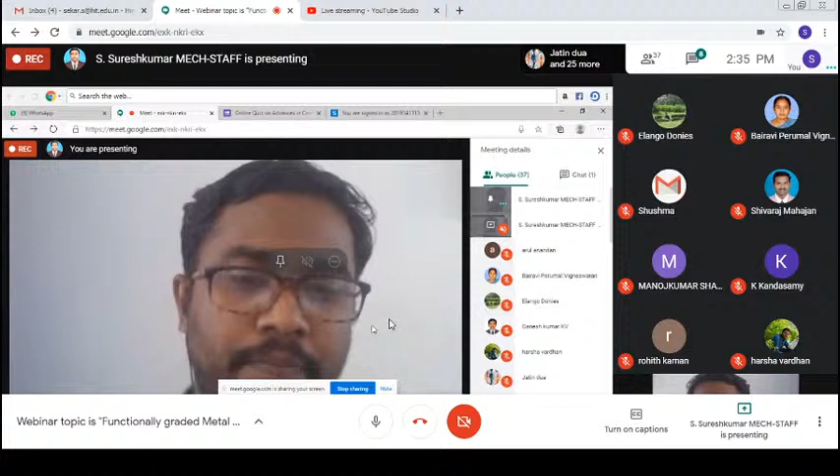Good afternoon to all. This is Suresh Kumar from Kalasalingam Academy of Research and Education. Sir, is my voice audible? Yes, yes. Can someone respond please? Sir, yes sir, clear audible. Okay sir, I will proceed.

Thank you, Dr. Sekar, for your nice introduction. I hope all the participants are good and safe, and I hope you had a good lunch. I will start my session. I will try to complete it in 45 minutes to 1 hour, and then if you have any queries, we will discuss them at the end of the session.

As I pointed out, my area of research is advanced machining. Since I am starting off attempting new areas, I am trying to explore my experience. My presentation will be on functionally graded metal matrix composites.

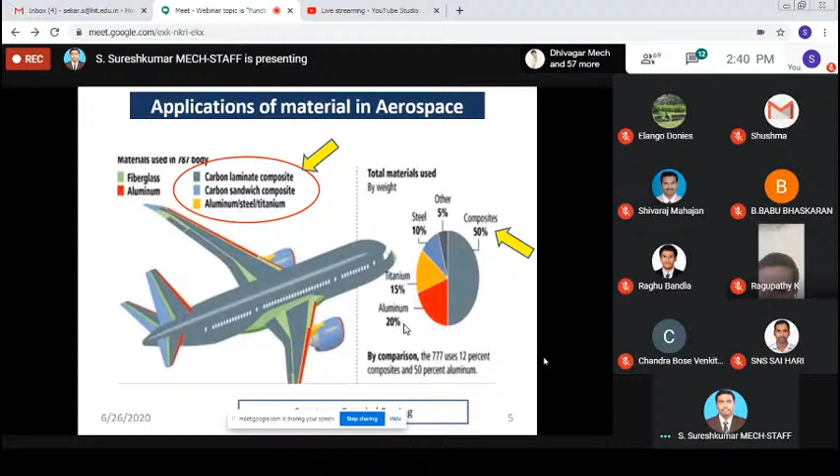So slowly, the existing conventional material of aerospace and flight is being replaced by composite material. From the record, this Boeing model plate has 50% of the material replaced by composites, and other models are maybe up to 12% composites, and even the aluminum roll is more, there is 20%. So I would like to highlight the importance of composite here.

For understanding the composite, you should know what is the meaning of composite. Often we have some confusion with the understanding of alloys and composites. So we should know the basics of alloys and composites. Both are almost similar, but what is the difference? I will go with some examples.

Consider what is the alloy. It is a homogeneous mixture. If you add sugar into the water, after some time the sugar gets diluted, dissolved in the water. So finally you will get a solution having the water and sugar mixed into one. So you cannot differentiate. This is the example for alloy.

Whereas if you add a sand particle into the water, you will see that you can identify or visualize the presence of the sand particle in the water. So this is the example for the composite. So alloy is a homogeneous type of mixture, whereas in composite it is a heterogeneous type of mixture.

In alloy there is a solvent and a solute. For example, there are bronze, brass. These are some of the alloys. Even aluminum, copper, and many titaniums have their own alloy elements.

On the composite side, we have two elements. One is the matrix, another one is the reinforcement. The matrix is the main element of the bonding mechanism in which the reinforcements are added. So I've given you the example for composite.

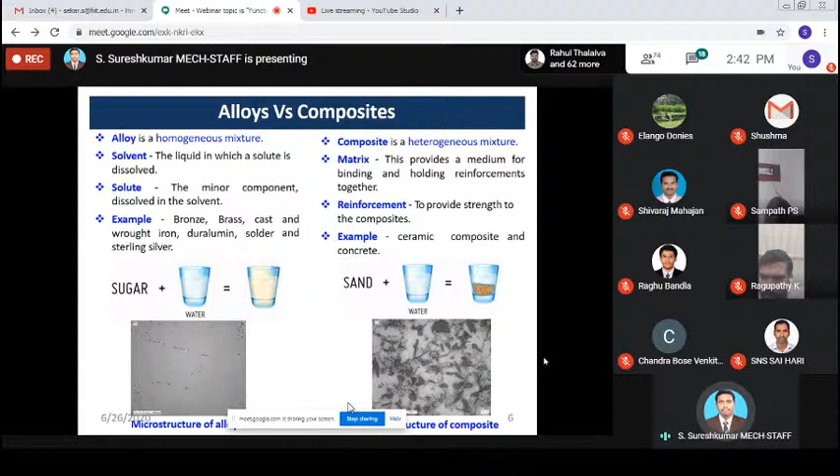Again, I will highlight some examples for the benefits of composite. I will highlight you here. Please listen to this one.

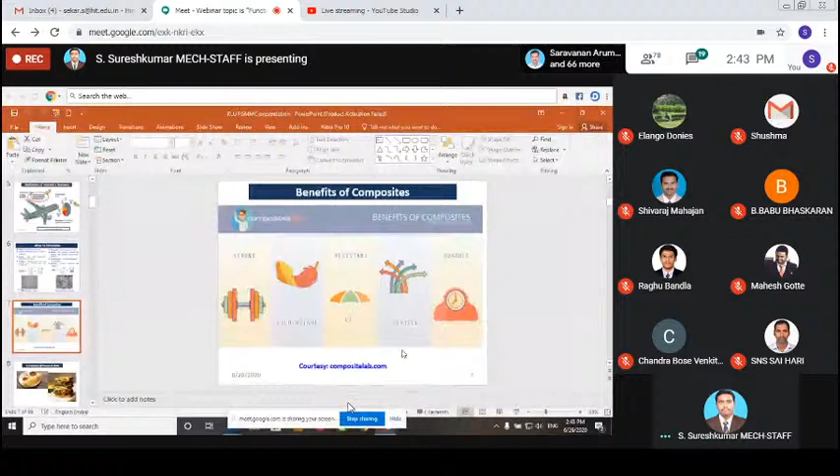So I've given you the example for what may be the benefits or the major advantages of composite material. I have given some examples. Composite material provides good strength, and it's very light for structural applications, aerospace applications, or other applications where I need a lightweight material, maybe the automobile side and all. So aluminum-based composites have a lightweight structure and resistance from thermal load, and it's flexible and the durability is more.

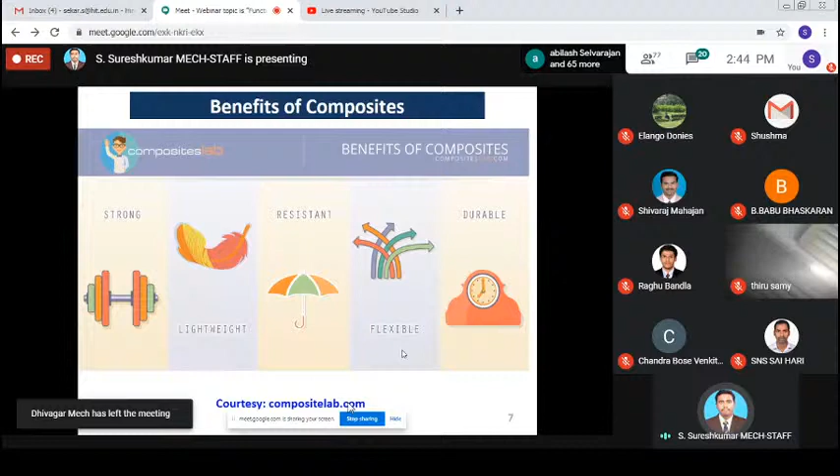Some examples I've given, thanks to compositelab.com, I got this right from the site only. And we think that composite is a very new idea, new things and all, but I give you basic examples and things.

And in between you are adding or inserting some salad, vegetables, right? So this composition combination is an example of a composite material. For understanding, I've given you some basic examples which we see in day-to-day life. And the composite in the human body, maybe the physical aspect I can say, the body and the soul, our spirit together - this is the composite structure available in the human body.

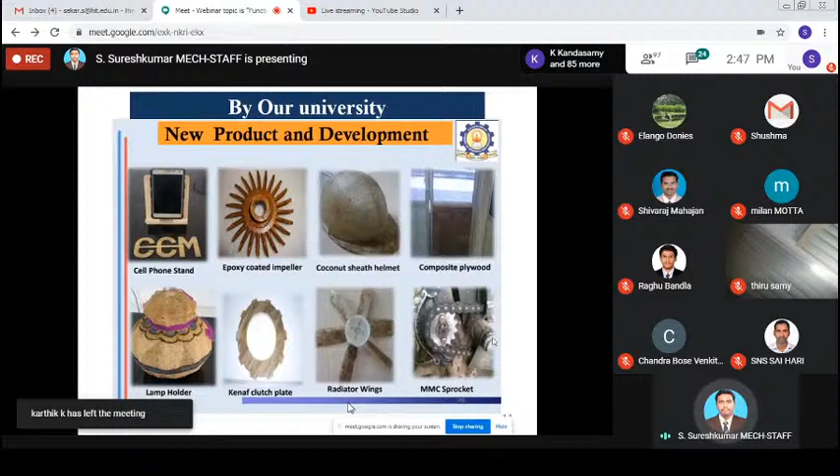Even the fan, the radiator wings - for impeller, or any fan and cooling applications, you can use this kind of wings. This is being replaced slowly by the polymer matrix composite based wings. And the last one is an example of metal matrix composite - we prepared aluminum based composite for the chain sprocket.

So I hope you have some idea about composites. Here the composite is classified based on the type of matrix material used for the product. If you use metal as the matrix, that comes under metal matrix composite; if the base is ceramic material, that is called ceramic matrix composite; and if you use polymers or resins or rubber as the matrix, that comes under polymer matrix composite. These are the very basic classifications of composite material, based on the type of matrix or base material used.

I have given you an example of metal matrix composite. I told you that in metal matrix composite, metal is used as the base matrix material, and some other reinforcement material is added. For example, on the left side, the first image shows an aluminum alloy, A356 aluminum alloy, used as the matrix material, and silicon carbide, which is a ceramic reinforcement material in particle form, is added as reinforcement. When you add this reinforced material into the aluminum alloy matrix, you get an aluminum alloy based composite material - that is the metal matrix composite. Thanks to Professor Vinoth Babu, I got this image from the paper.

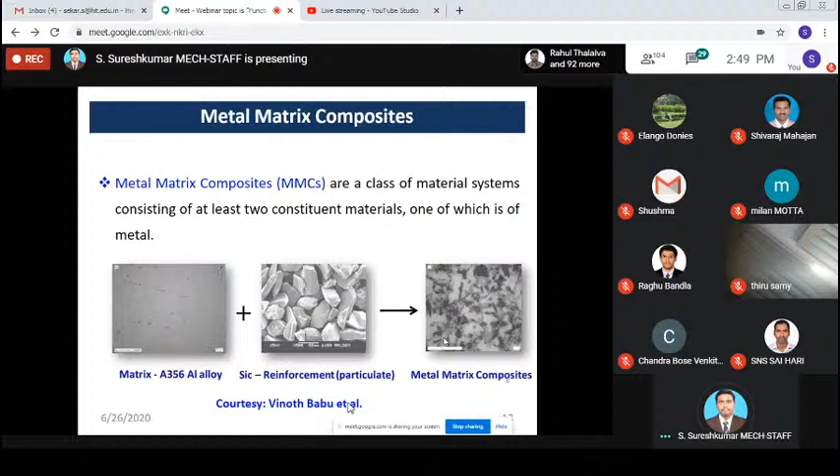The last one, and an important one, is particle reinforced or dispersion hardened composite, which plays a major role. Most metal matrix composites are produced using this kind of method only - particle reinforced type.

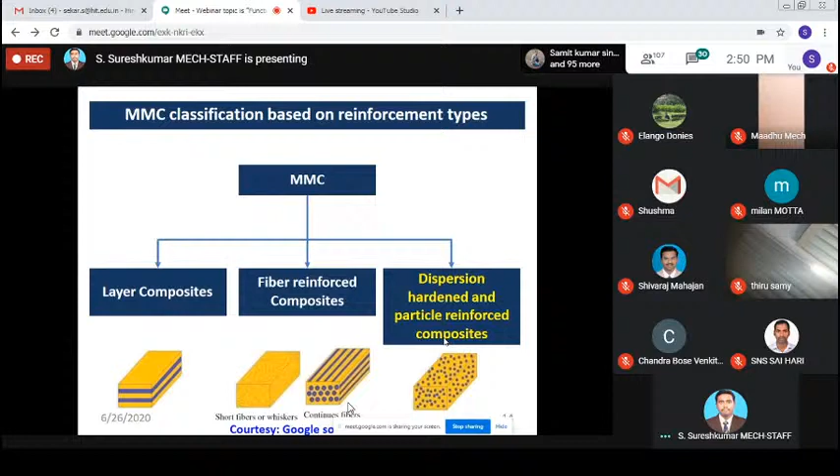What may be the basic properties of MMC? Why are people moving towards MMC? I have listed a few properties: it has good strength, is lightweight, and can withstand high temperatures. It has high corrosion resistance, and stiffness is much higher. It can withstand heavy, larger loads. Wear resistance is high, and fatigue resistance and creep resistance are high. It can withstand higher temperatures and retain its properties even at higher temperature. These are the few listed properties, or advantages, of metal matrix composites.

Some of the examples where metal matrix composite can be used nowadays: engine crankshaft casing, connecting rod, piston head, and electronic devices like circuit boards used in laptops, TVs and gadgets. The last one is wind turbines or propeller units used in aerospace and engine systems. So these are the basic applications.

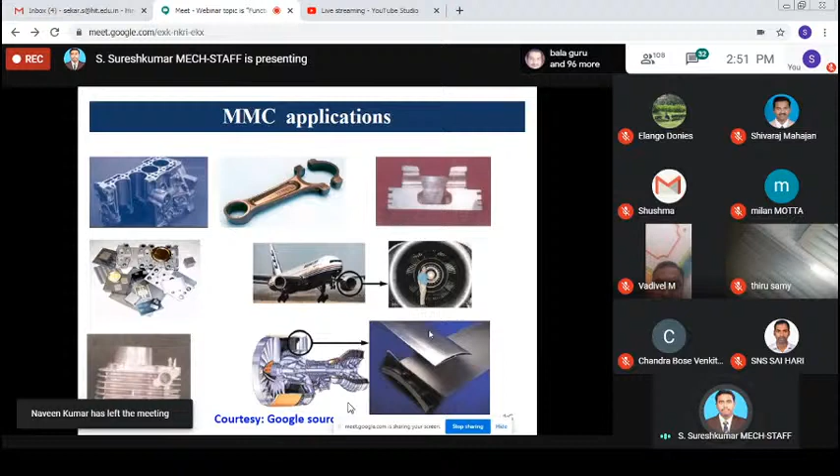Nowadays the MMC plays a major role. And for understanding, let me go back to the same examples.

I told you the chain sprocket, usually made of cast iron steel, is nowadays replaced by aluminum based metal matrix composite produced by our department. Thanks to Dr. Rajesh, sir has developed a chain sprocket made of aluminum based metal matrix composites.

For understanding, I have given you some diagrams. The gear, the sprocket shape, is given in the right side view, and the left side view shows the replacement of the white color sprocket made of aluminum based composites.

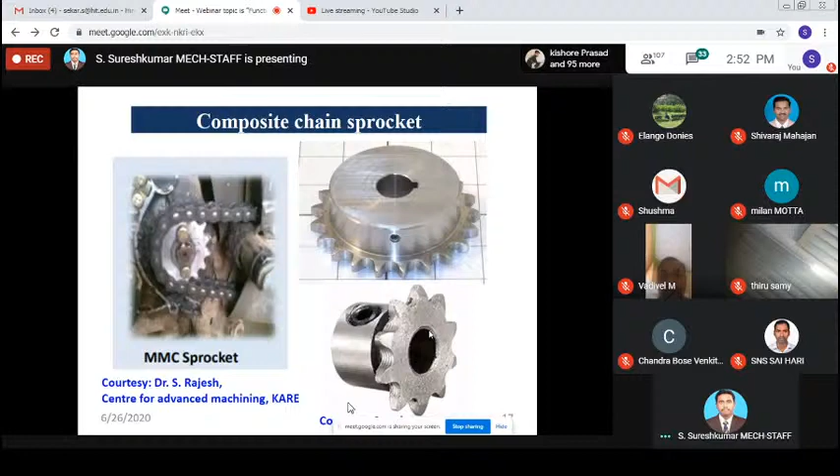Of course, this material has many merits and advantages, but even though, it is having some drawbacks. I will be keen focusing on the drawbacks of MMC here.

The reason is, some of the drawbacks listed here: there is a necessity to produce a composite material for an application, specific to a particular location or condition or service need. But MMC may have the same property throughout the section, whereas some applications need a particular or location-specific property. For example, in a brake disc, the load acts on a particular region only.

That region may be exposed and subjected to more wear than other sections. So if you want to replace the brake with MMC material, that's good, but only the particular region is subject to huge load. So is there any possibility to replace such a material with MMC, where a particular location may need a better property than other regions?

Is there any possibility? So these are some of the drawbacks in case of MMC. It also has a problem with selecting the right fabrication method for a particular material, application, or design need. The cost spent fabricating such a material may also be more, based on the experimental setup required for fabrication. And the last one is choosing the right material for the right particular application.

There are also a few drawbacks with metal matrix composites. So what should we do?

Sorry sir, present now sir. Yes sir, your presentation is... present now sir. Sir, is it okay? No sir. Please click present now. Sir, is it okay? Okay sir. Yes. So, okay, shall I proceed? Okay sir, okay sir, can you proceed sir?

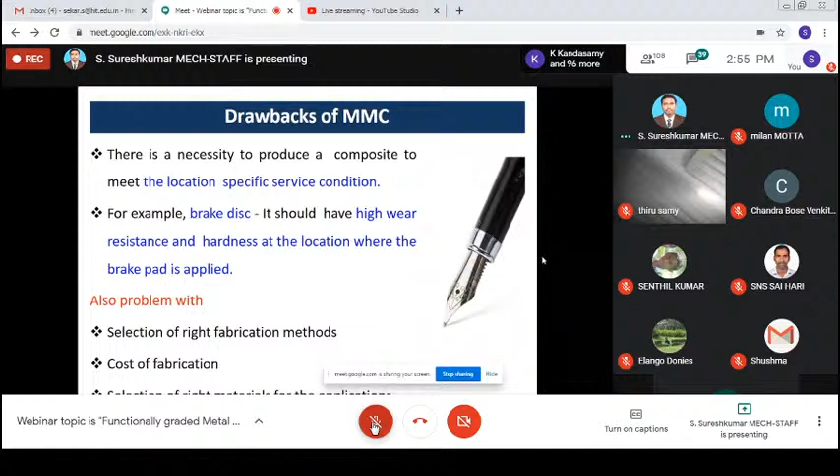So we come across these drawbacks with the MMC. It doesn't have location specific properties, right? What should we do? How can we overcome these things?

So with that, researchers, maybe during the 80s or 90s, later slowly people have picked up on this. They wanted to develop a material where the composite still has location specific properties. How can we fabricate such a thing? What possibilities are available?

So here I have given you some images.

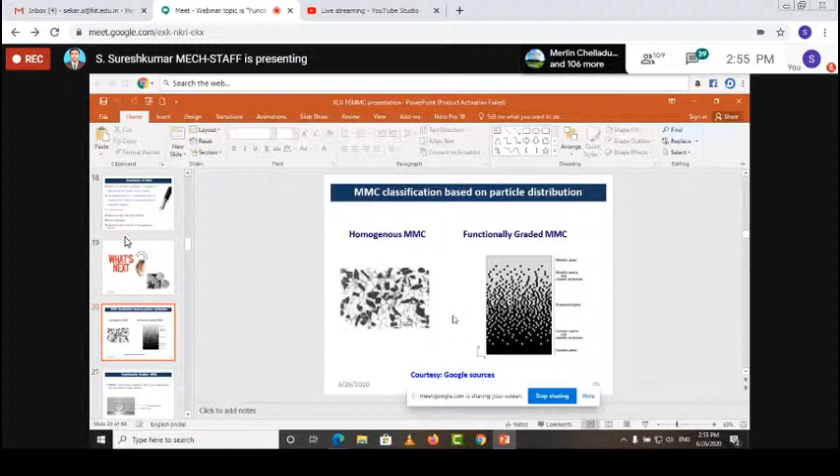Let's look at the example I've given, the microstructure of the metal matrix composite. The white color shows some alloy, some matrix material. The black color...

Sir? Is it okay? So you carry on, sir?

Okay, the left side one is the metal matrix composite, the microstructure of the metal matrix composite. The white color shows the matrix material, and the black color shows the presence of reinforcement material, the hard particles, in this material.

Maybe more or less the reinforcement presence is uniform, dispersed uniformly throughout the area. But whereas if you come to the right side material, see the black color and the white color, you can identify the differences. The presence of or the amount or the area covered by that black color is varying. Maybe at the bottom the black color is more, and if you move upward the ratio becomes lower, the black color becomes less. So it means the reinforcement present in the material is varying.

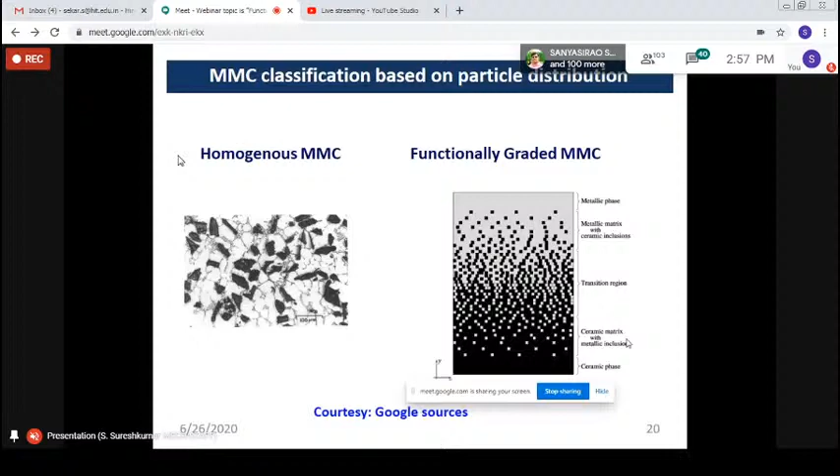The amount of reinforcement present is varying. Maybe at the bottom section it is more, and when you move upward it is slowly reducing, and when it reaches the top point it is almost nil. So how can we vary the reinforcement? I told you, location specific metal matrix composite. How can we produce it? In this case, the reinforcement is huge in quantity at the bottom section, maybe in between it is mixed, and at the top it is less or almost nil. So by varying the presence of reinforcement or grading the reinforcing particle in a particular axis, that is the only solution for overcoming such drawbacks.

Sir, right? Sorry, sir, example. Sir, yes, press sir. Click the present, no sir. Okay, sir, okay.

By varying the presence of reinforcement content throughout the material with some axis or some direction, this is the only solution for attaining a particular outcome or overcoming such a drawback. So this material is called functionally graded metal matrix composite. The name functionally graded indicates that the reinforcement is graded or varying in a particular direction. Maybe for example, I can go with the same thing, the brake and all.

The particular location where the brake pads are applied or holding the brake, where more amount of pressure is being subjected, there you can ensure the presence of more amount of reinforcement particle, whereas in other regions you can normalize the amount of reinforcement particle.

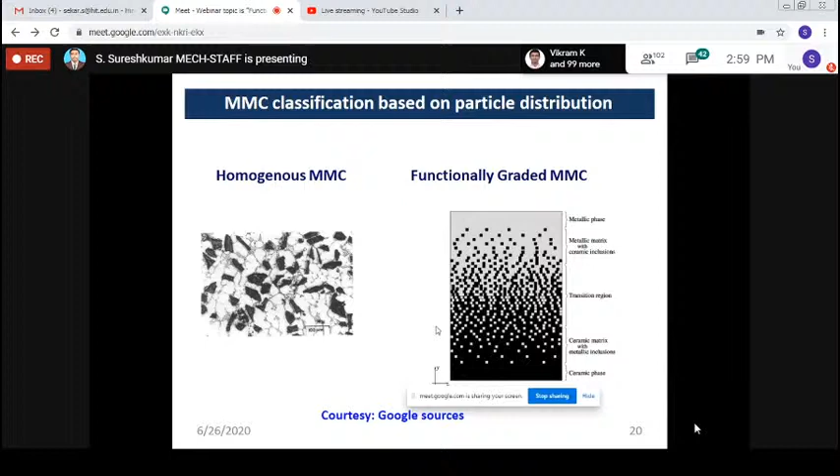Don't think that for fabricating functionally graded metal matrix composite, that is FGMMC, you need more reinforcement overall. Not like this. You are just varying the reinforcement content. Maybe at a particular location you keep the reinforcement content more in quantity, and in other regions you vary it gradually, based on the requirement you can change it. So my point is FGMMC means you are changing the amount of presence of reinforcement material in a particular direction based on your requirement. That is the understanding you can come to know from functionally graded metal matrix composites.

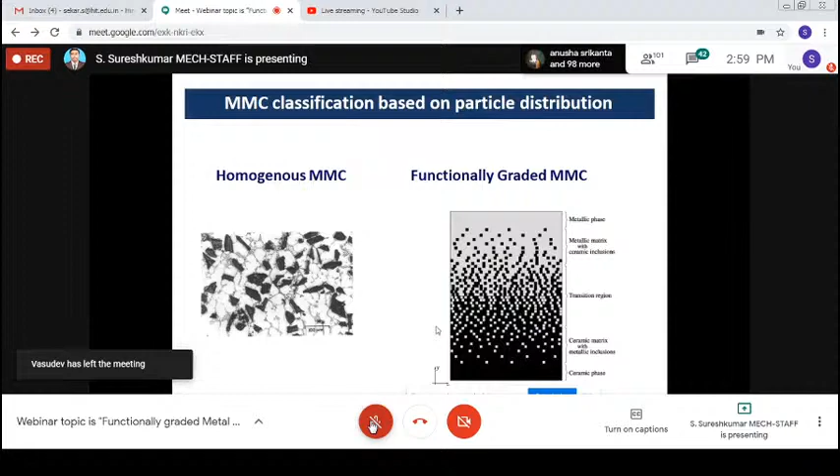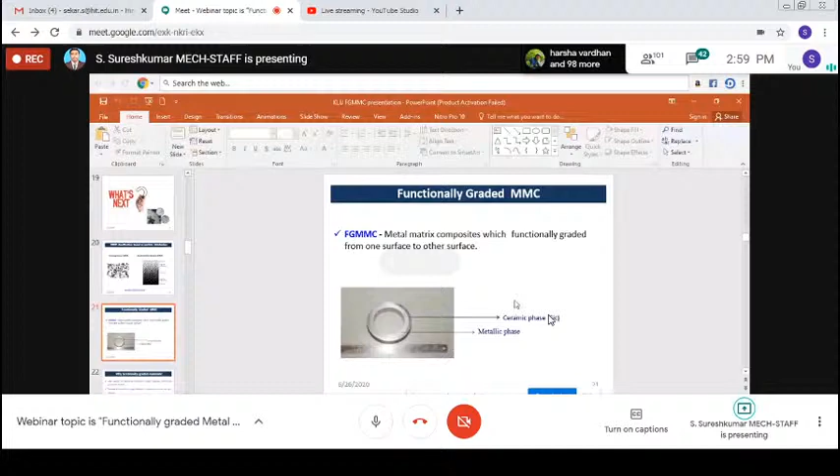Understanding how the material looks like, I give one example on images. Sir, please present now. Sir, it shows like it is presenting. I don't know what is happening. Is it okay? Okay sir. Sir, please try another option here below the slide. Hide. Stop sharing and hide, and please click in your system. Yes, okay sir, okay sir. Sir, please click the hide. Okay, okay sir, thank you.

Okay, right. I give you the example of the FGMMC. Actually it is a tab what we use for packing items, right, so this is the same thing I gave as an example. See the one end, that is the left side, inner portion, inner periphery, marked as white color, that we can call metallic. The plastic cover, the tab material, the tab, that you can consider as the ceramic region. So one end we are having more metallic phase, another end we are having the ceramic phase. So you are varying the presence of ceramic phase from one region to another. Just for understanding, I gave you this example, the packing tab, where one end the tab is more, and at the other end it is not available, right.

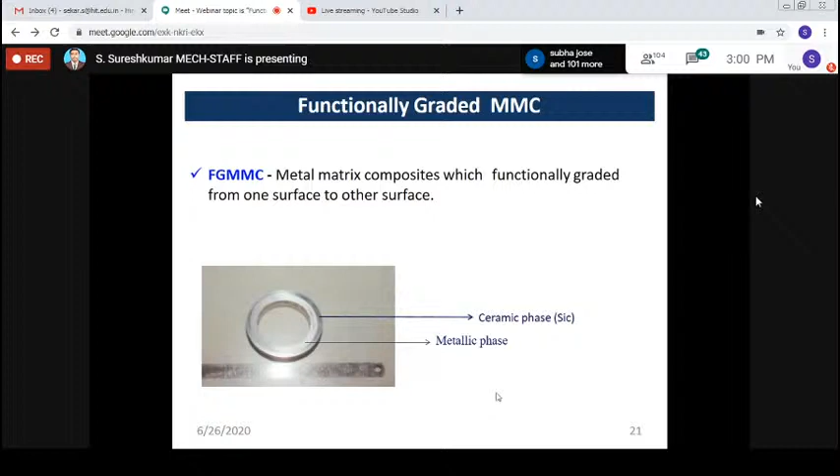Why, or at what locations, is there a basic need for functionally graded materials? Again, I give you some other similar examples. Gear failure happens with more wear at the edges, maybe the gear teeth and all. So we often come to the conclusion that the wear edge, the teeth, has more worn surfaces. So once it is worn out, we cannot use this gear anymore. But the other surfaces don't have any fault. Simply being worn out in more quantity only at the teeth means we need to replace it.

For such cases, we can go for functionally graded materials. As I told you, you can have more reinforcement material only in the teeth sections, where this region may need more resistance to the load, whereas the other region can ensure the presence of a lower or minimum amount of reinforced material.

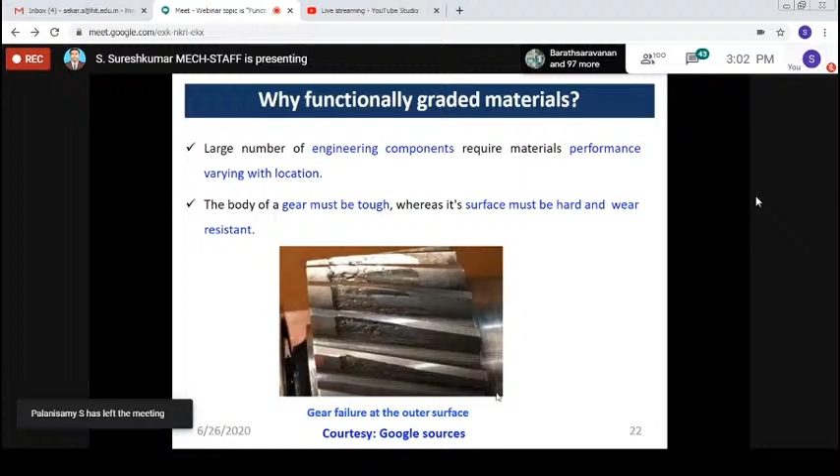Only where the more wear and tear is happening, those regions you can concentrate where you can ensure the presence of more amount of reinforced material. For example, in many applications the gear is being used, so only the teeth section is subject to high wear and tear. Another example, if you look into the piston, the piston head is mostly subjected to wear.

Maybe we are using the lubrication, but of course there will be wear and tear occurring at the outer surface, especially at the head section of the piston. So more amount of wear is happening there.

The second thing, the brake pad is located only at a particular circumferential area, so more amount of wear is noticed there. And again, in case of turbines, the propeller side, even the aerospace side or power plant, the turbine blade is subject to a huge amount of load.

So if you look into the other part of the component, you won't notice much wear. But only at the edges or a particular location or specific point, you can have more wear and tear. For this kind of application, you can go with functional graded materials, where a particular point needs a material having a superior property, whereas the other section may need a normal level. So the properties may be enough, but maximum load occurs only in a particular region. For dealing with or replacing such a material, you can go with functional graded material.

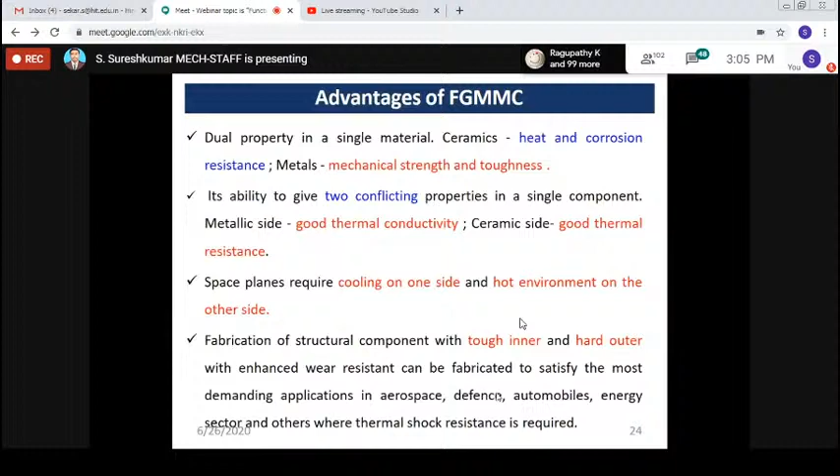Maybe one surface or outer region is exposed to a different load, whereas the inner portion of the material can hold different properties. Especially in this kind of application, the role of FGMMC is important.

How can we fabricate the FGMMC? Is there any possibility? What is the mechanism they are doing? Most widely, centrifugal casting is the way. Casting followed with centrifugal casting is the most widely used fabrication technique for forming functional graded metal matrix composites.

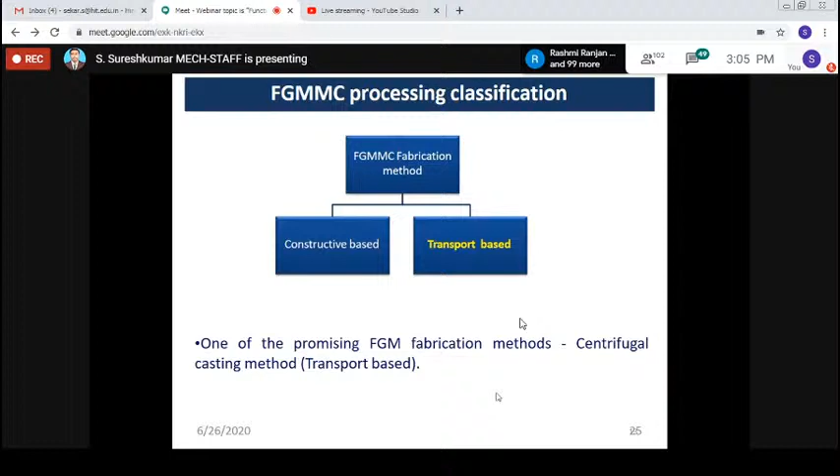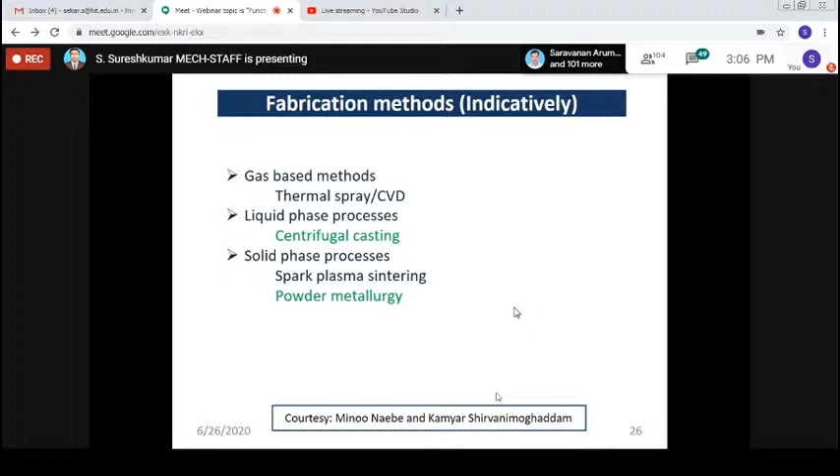These are collectively the fabrication techniques I have mentioned: thermal spray or chemical vapor deposition, centrifugal casting. For solid phase, you can use powder metallurgy, which is a very new thing. Even through thermal spray coating, you can form a material having different properties. In a particular region you can go for more layer coating, whereas in another region you can go with a lesser number of coatings, so the variation in coating will result in different properties. Like centrifugal casting, which I will explain in detail, spark plasma sintering and powder metallurgy are also fabrication techniques I will give you for better understanding.

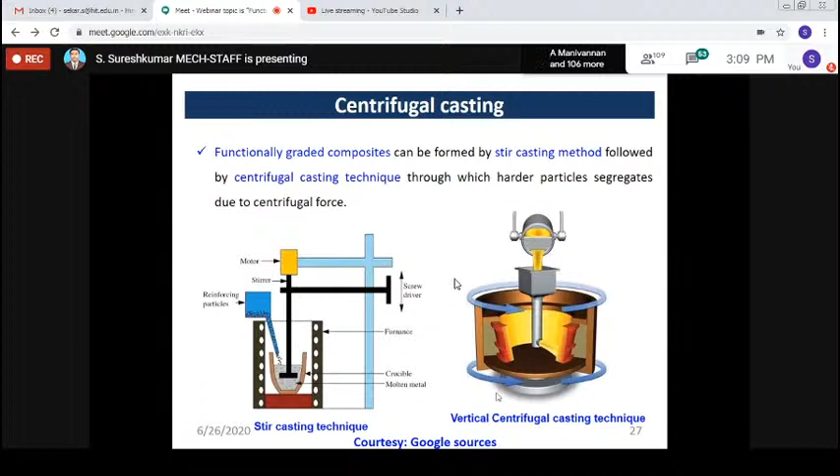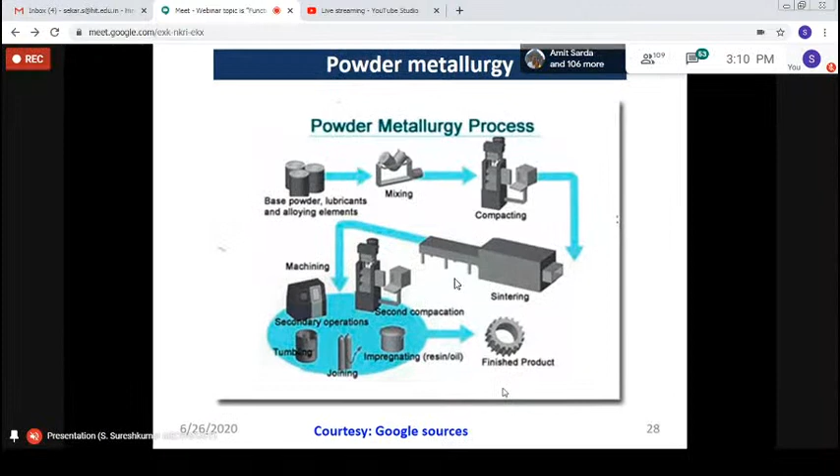The second technique is powder metallurgy. In this case, you can produce or fabricate any kind of object, any cylinder or rod, having varying reinforcement content. You can stack the powder and reinforcement blended mixture in different ratios, and thereby get the desired property.

Powder metallurgy is a solid-state composite material fabrication technique. Here you use the material in powder form, so you can mix the materials. For example, I will take aluminum powder and the reinforcing particles, blend and mix them, and pour the mixture into a die, where the material is subjected to compacting under high pressure.

After compacting, you keep the sample in a furnace for the sintering process, the heating process. Sintering may be done at almost 80-90% of the melting point of the matrix. So after the sintering process, you can produce the composite material.

It is a very conventional way, but for functionally graded metal matrix composites, the material that you add to the die will vary. In the first phase, you add a mixture having a particular ratio of reinforcement. In the next layer or stage, you can have more reinforcement, a mixture with a higher percentage of reinforcement.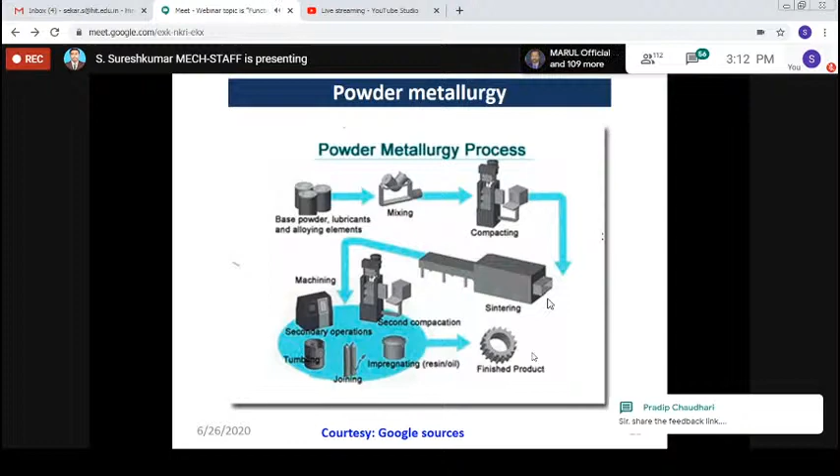For example, for a gear, you can choose this kind of approach: only the teeth section or head section needs more strength, which you attain by using the last section of the mixture, having more reinforcement particles. This is one way of attaining such properties.

So as I told you, powder metallurgy and centrifugal casting are the most widely used techniques for fabricating functionally graded metal matrix composites. For understanding FGMMC...

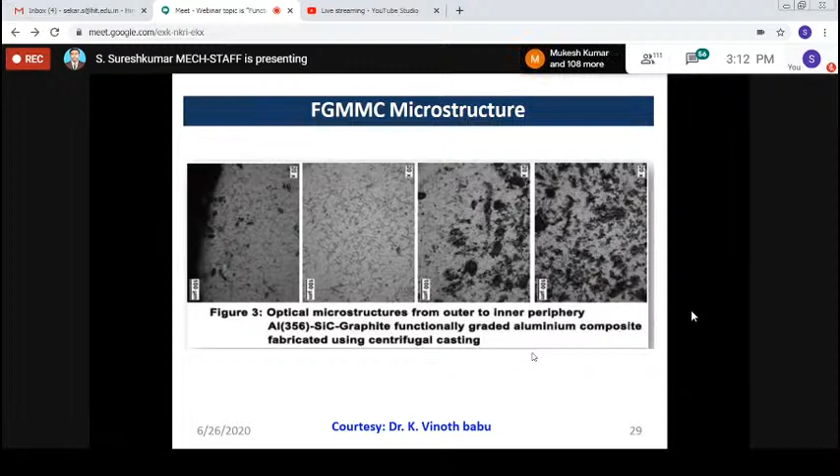I've given you the microstructure from the previous paper — maybe at one end, showing the amount of reinforced particles, and at the other end, how it varies. As I told you, you are producing a hollow object: the inner section is shown on the left side of the image, and the outer surface of the material is shown on the right side.

Most of the participants mentioned the audio is low. Maybe on the left side it is less, maybe on the higher right side it is more. That means the reinforcement, the amount of reinforcement present in the outer shell is much more, right? This is actual work published in good journals.

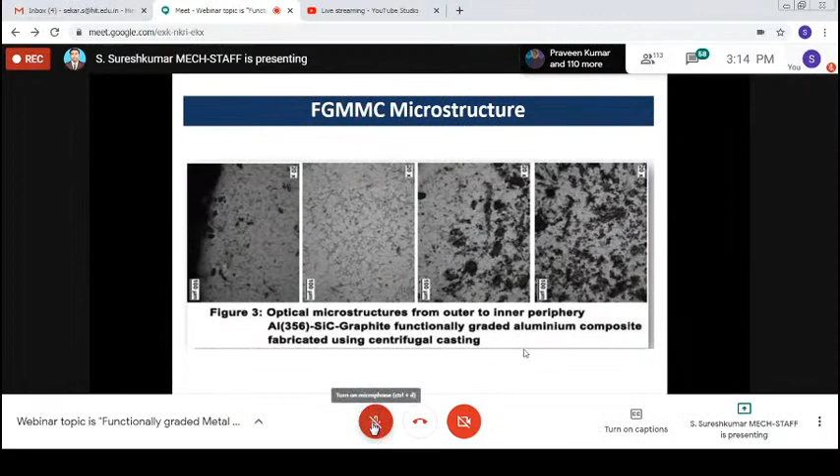So through centrifugal casting, this was fabricated, which has different properties. The outer section has more reinforcement content, whereas the inner portion, the left side image, has the least amount of reinforced particles.

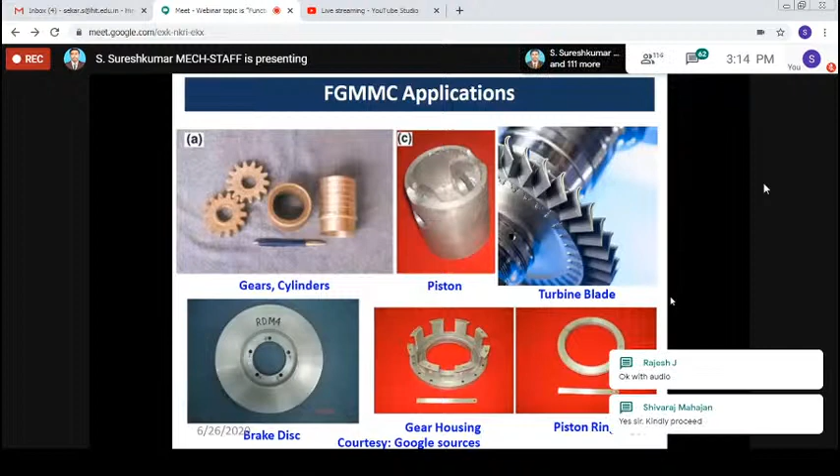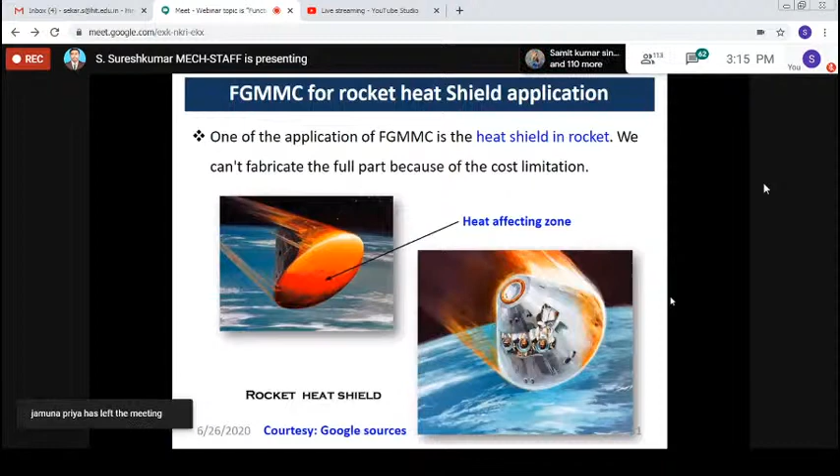Another example is in the space application area. Maybe one area needs to be a more heat affected zone, subject to more heat energy, whereas other regions may require a lower temperature. For this kind of application, you can go with FGMMC. One end could have a more ceramic rich region which can withstand huge thermal load, while in other sections you can lower the amount of reinforcement, where the metallic phase may be good.

We have discussed how we can fabricate the FGMMC. Now my question is whether the fabricated FGMMC could be used for real product activities. Of course, the produced material may have irregularities in the surfaces. How can we deal with such material? How can we convert the fabricated FGMMC composite material into real-time application, real-time uses, or use it for making the product?

For this we need to go with secondary processing, as we do processing for converting the produced FGMMC product, the FGMMC composite, into real-time products. We can come across a few secondary operations, but the most widely used choice is...

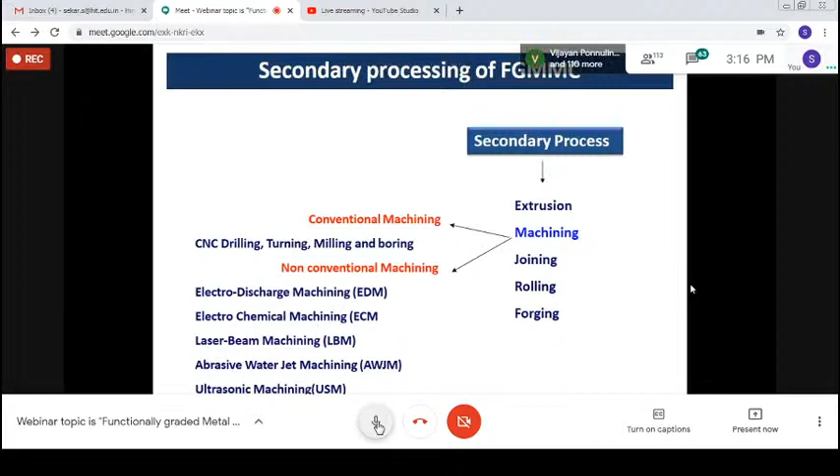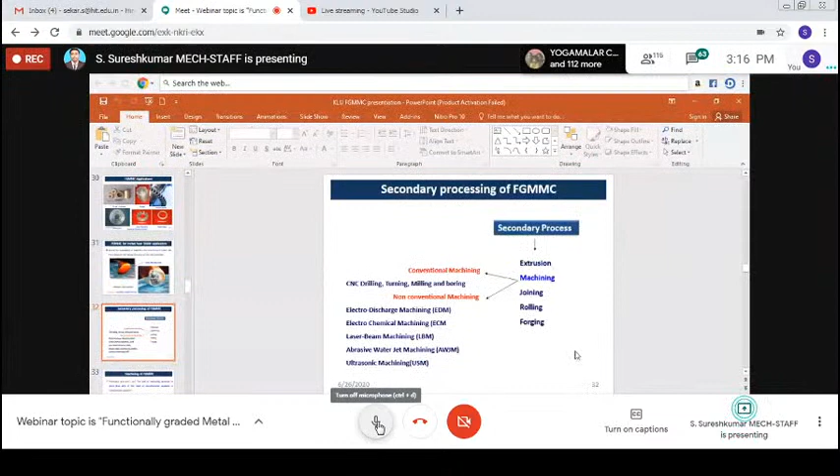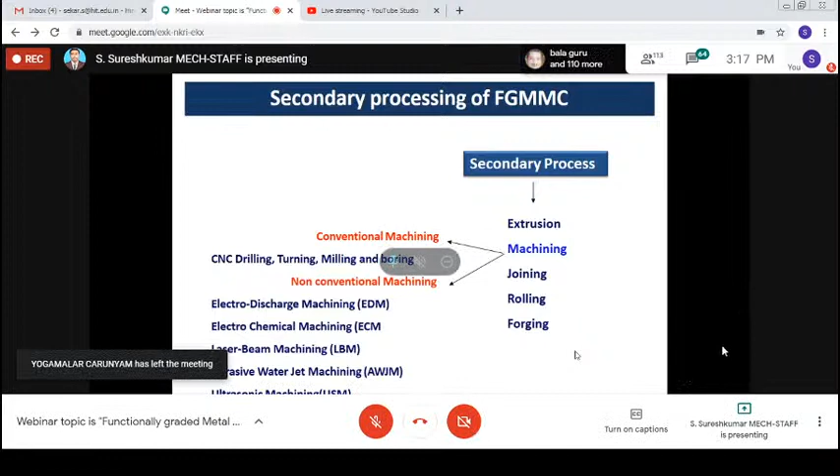Most people know machining is categorized into two aspects: conventional and non-conventional machining. So FGMMC could be prepared or processed through any of these conventional or non-conventional machining processes, so that it could be made into a readily usable form.

Few researchers have already attempted to process the FGMMC material by conventional methods of machining, and researchers have also started on non-conventional machining processes.

Machining is now an inevitable thing, because the cost of machining amounts to more than 20% of the manufactured product, but it's supposed to undergo the machining process to bring the product to the required state. Sometimes machinability is very difficult, because the presence of reinforcing particles rich in quantity at a particular point leads to poor machinability.

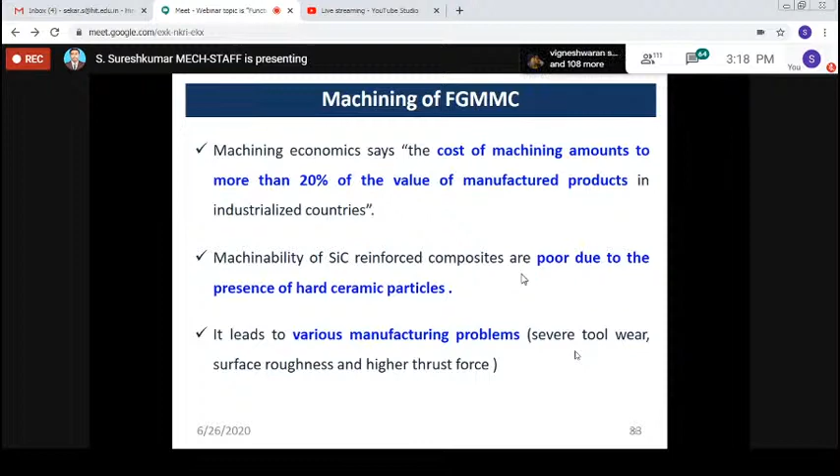Sometimes we will come across various manufacturing issues, like more severe tool wear, poor finishing, and the machining process being subject to a huge amount of thrust force. So we need to consider that aspect also.

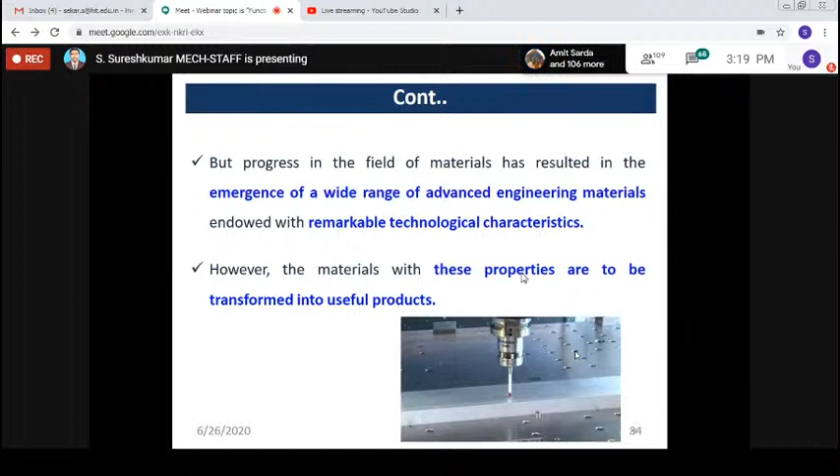Progress in the field of materials has resulted in the emergence of a wide range of advanced engineering materials, and we also need to consider that with remarkable technological characteristics. However, materials with these properties are to be transformed into useful products, so that's why we need to choose machining operations.

FGMMC are often covered with near-net shape processing, and achieving final designed dimensions and required surface is also a mandatory task for engineers and manufacturers nowadays. Secondary machining operations like turning, drilling are also required. Good machinability may be implied by the optimal combination of cutting tool settings and good surface finish, with lower wear, fewer burr formations, and better material removal.

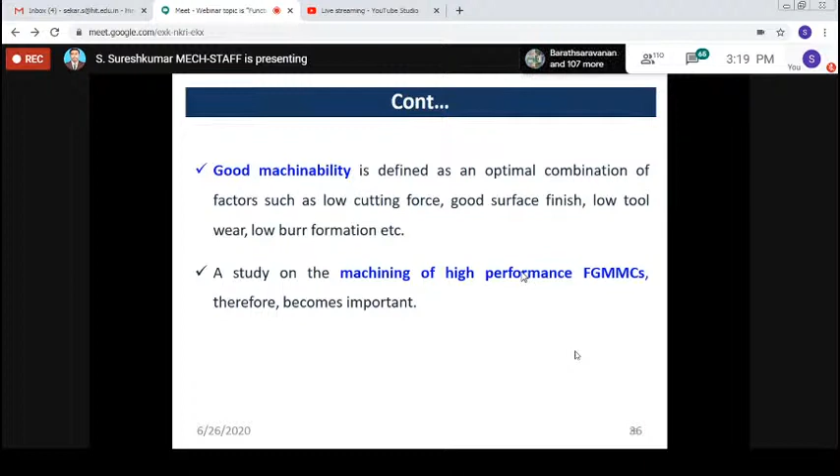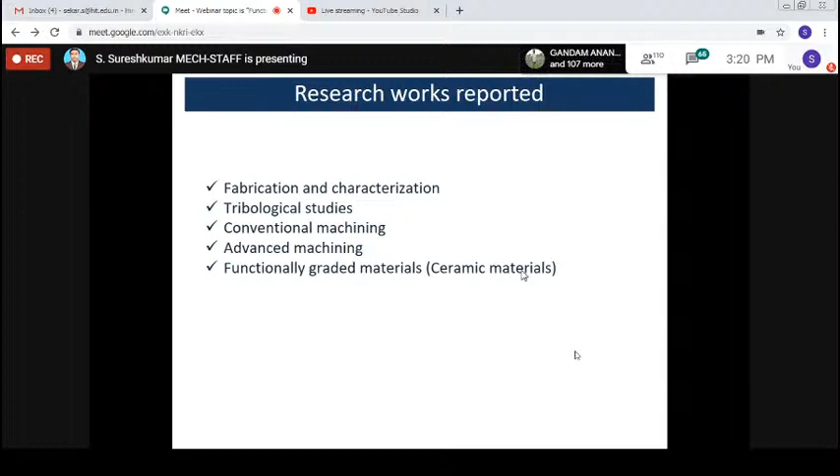I will now move on to the research work reported so far on FGMMC. I have categorized this research work: some authors were interested in fabricating the compound FGMMC and characterizing it as a material, a few did tribological studies to understand the wear resistance of FGMMC for certain applications, some attempted conventional machining while others tried advanced machining processes, and very few have formed ceramic based functionally graded materials. So I have categorized the research reported on FGMMC so far into these aspects. Hereafter I will be discussing the research work reported so far.

Even though research on this topic started in the 1980s, after around 2005 or 2006 the research work reported on FGMMC increased significantly.

Sorry sir, excuse me sir. Someone is having a personal issue. Is it okay? Yes sir, okay.

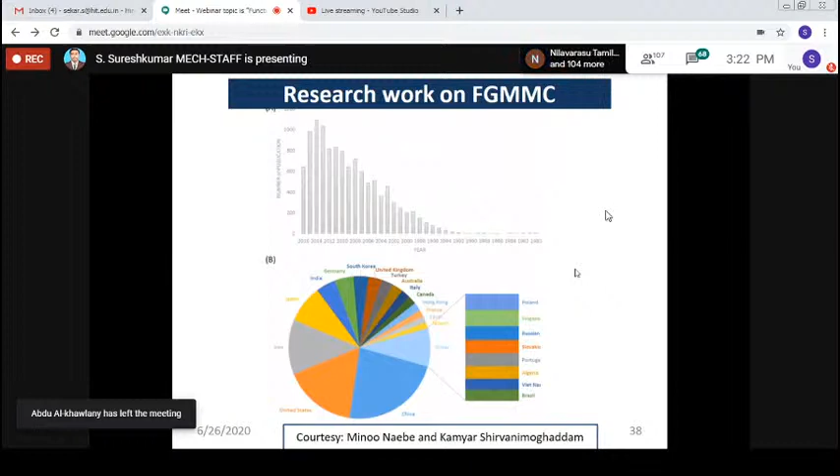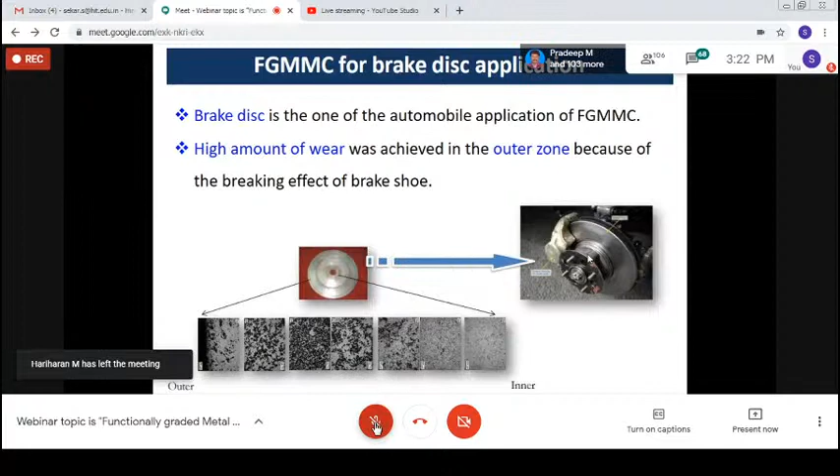Professor Vinod Babu and his team attempted to fabricate a functionally graded metal matrix composite for brake disc applications. In the middle, I have shown the product they manufactured using stir casting followed by centrifugal casting, and its microstructure. From the inner region to the outer region, the amount of reinforcement content varies.

Sorry, excuse me sir. Is it okay, sir? Okay sir, Mr. Suresh please mute your audio. Shall I continue sir? Okay sir, sorry, can you carry on sir? Yes sir.

He fabricated the FGMMC brake disc, made of aluminum alloy reinforced with silicon carbide at different amounts. Looking at the microstructure from the right end, the inner periphery of the brake disc has less reinforcement. Moving towards the left end it increases, and at the leftmost end, the outer periphery, it reduces again. So the third and fourth microstructure images show a particular location with more presence of silicon carbide particles.

This shows that only in a particular region is more reinforcement available. I want to highlight that the brake is subjected to more load at particular regions, so if that region has more reinforcement than the aluminum matrix alone, it can withstand a huge amount of load and have more wear resistance. With that idea, they fabricated the brake disc; that is their design philosophy.

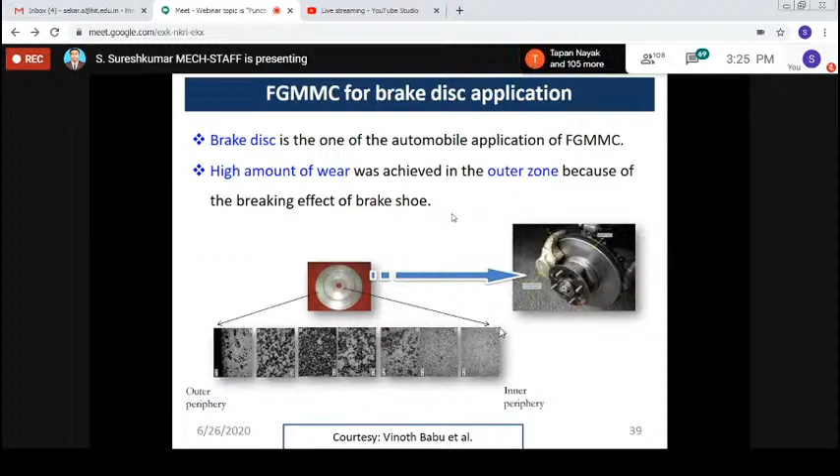They characterized the materials using optical microscope images. The middle region of the brake disc has a rich reinforcement structure, whereas the other regions have the least reinforcement.

Other researchers reported similar findings. This graph helps us understand the presence of silicon carbide concentration in different regions of the material. At the outer surface, up to about 3 or 4 mm, the presence of reinforcement particles is more, maybe 50-60%. Moving towards 5, 6, 7, 8 millimeters, the quantity of reinforcement particles becomes less. Another diagram shows the same trend.

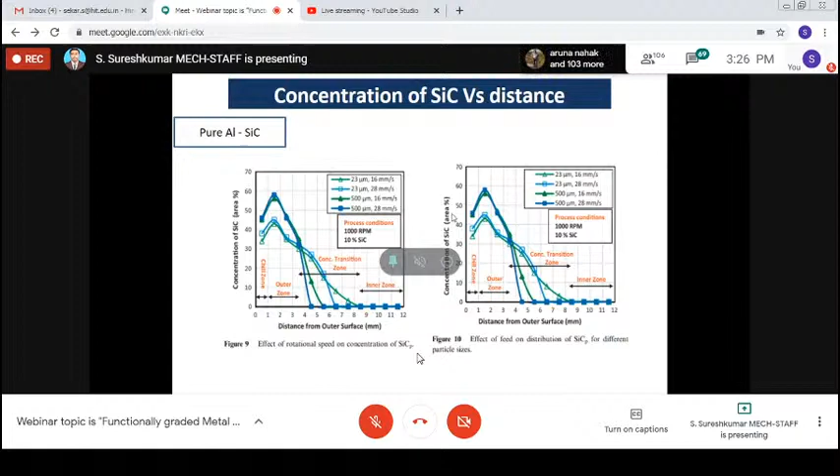So only in a particular region can you identify or ensure the composite has more reinforcement particles, whereas in the middle or transition zone it is normal, and in the inner zone of the material it is very less.

With that same aspect, here is another research work, a tribological study on wear carried out on FGMMC material. Especially in automobile applications, the brake disc undergoes abrasive wear, scratching caused by the pressure applied by the brake pad.

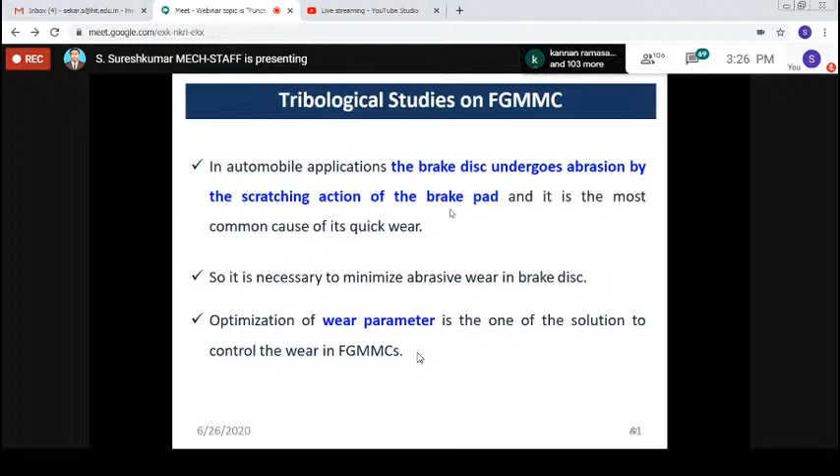So how can we minimize this wear? In that aspect, the second example is the piston. Dr. Arsha et al. fabricated an aluminum alloy based FGMMC piston. We have compared the left side image showing the fabrication setup of a vertical casting machine, and the right side shows two piston views, one made with aluminum alloy A390.

A section view is shown. The head section of the piston is subjected to more wear and tear, whereas the skirt at the bottom side is subject to lower wear. So we need to produce a piston having more wear resistance at the top or head section.

The yellow arrow mark shows that the presence of reinforcing particle is higher, increasing hardness as we move towards the head section of the piston. The reinforcement amount is varied, gradually increasing upward, so the top section has more reinforcement particles. This section will have more wear resistance and can stand more load.

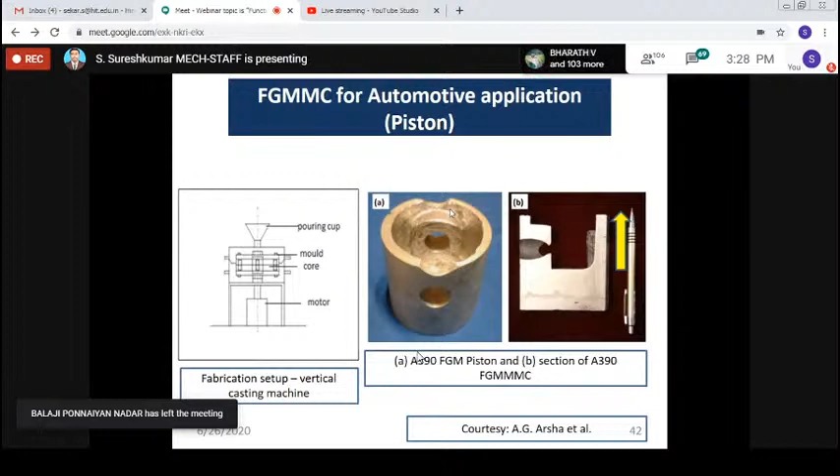The wear rate reported by both materials, the aluminum alloy and the composite produced by vertical casting, show that the head side has more reinforcement while the bottom side has less. Comparing the wear resistance, the weight loss after the wear test is comparatively less on the head side. This indirectly indicates that the wear resistance of the head section is higher than the middle section and the skirt or bottom side.

In both graphs, three lines are marked. The lines show the wear loss occurring at the head section, middle section, and bottom section of the piston, indicating which section is subject to more weight loss and more wear.

They reported a gradual decrement in weight loss, meaning the wear rate decreases when varying the percentage of reinforced particles throughout the section. The head section, having more reinforced particles, is subject to a lower weight loss of maximum 0.01 gram, whereas the bottom section is subject to about 0.04 to 0.05 gram, meaning more weight loss occurs at the bottom.

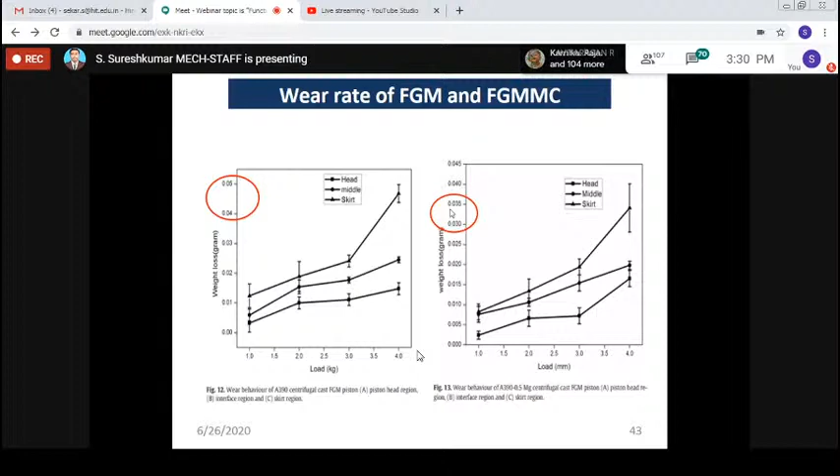For another example, Professor T.P. Raj, a scientist, in his research paper mentioned he fabricated a composite having different reinforcement, with the reinforcement content varying.

The left side, figure A, shows the alloy only with no reinforcement. The middle image has a minimal amount of reinforcement, and the last one has more reinforcement. He compared the hardness of the FGMMC material produced as a function of the distance from the outer periphery to the inner periphery.

At the outer edge, it is normal, but at 5 mm or 10 mm from the outer edge, where more reinforcement is available, it ends up with more hardness. Whereas moving towards the inner periphery, the hardness value obtained is less, gradually decreasing. So moving towards the inner region or inner section of the material, there is a gradual decrement in the hardness potential.

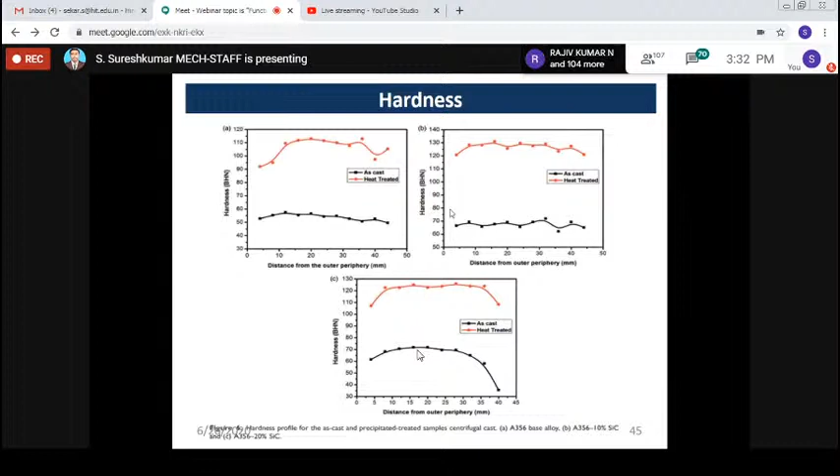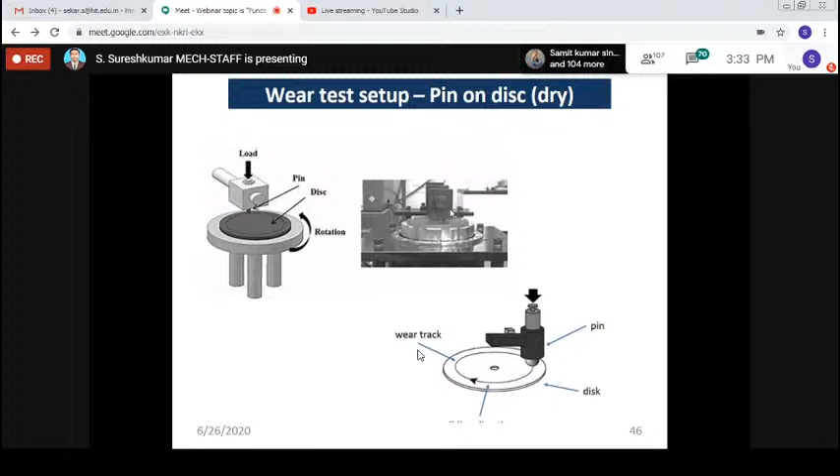So what is the variation? As I told you, in case of brake control, wear resistance may be required at a particular point, whereas in other regions you can have lower wear resistance. At the point where the brake pad is applying, you need more wear resistance, so in that section you can measure the wear resistance and compare it with the inner region. So what is the relationship between the difference in wear resistance in the two different regions?

I told you, in the outer region, since it's FGMMC, more amount of reinforcement is available there, so it can enhance the wear resistance property. As hard particles are present, it can give resistance to wear, the abrasive load. So the wear rate varies at the two different regions.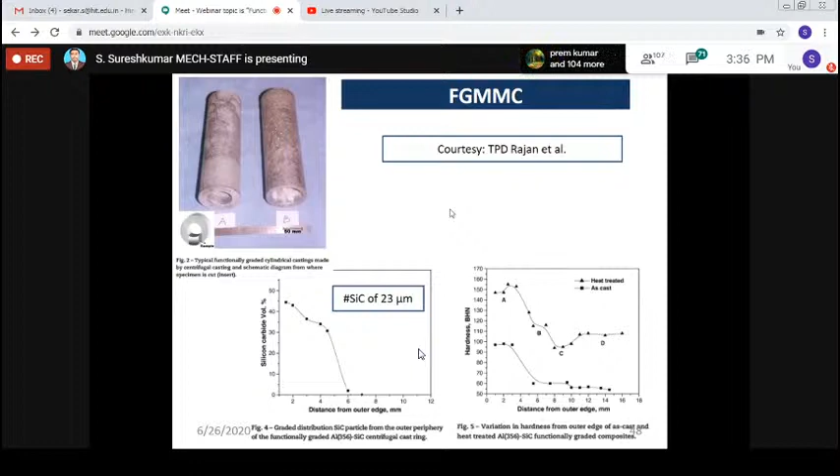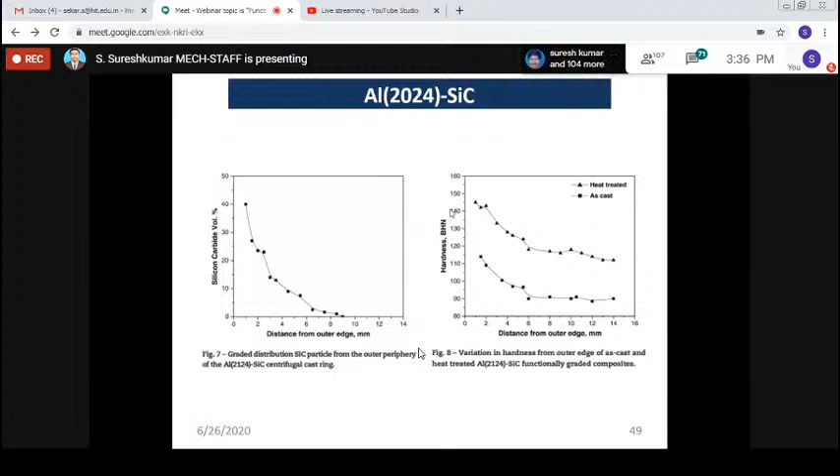The silicon carbide particle size used for fabrication is 23 micrometers. The same similar thing is reported for some other composites, aluminum 2024 alloy reinforced with silicon carbide. For this case again, it is gradually decreasing, and the hardness value also decreases. So when you move towards the inner periphery of the hollow cylinder, the material property is being reduced.

Mr. Prathap Singh and his team have done drilling studies on functionally graded metal matrix composite. I have found here 3 different sections: 1, 2, 3. One indicates the outer region, second indicates the transition and middle region, and 3 indicates the inner zone. So in these 3 regions, what are the different characteristics, the drilling studies obtained at three different regions, are compared in this one.

We have chosen the drilling process with coated carbide tools with some input parameters, and some variation in the machinability. What is the surface roughness produced at three different regions, they have pointed out. As I told you, at the point where the reinforcement is rich, there is more resistance to metal removal, so it will end up with poor surface finish, and of course it produces more thrust force also.

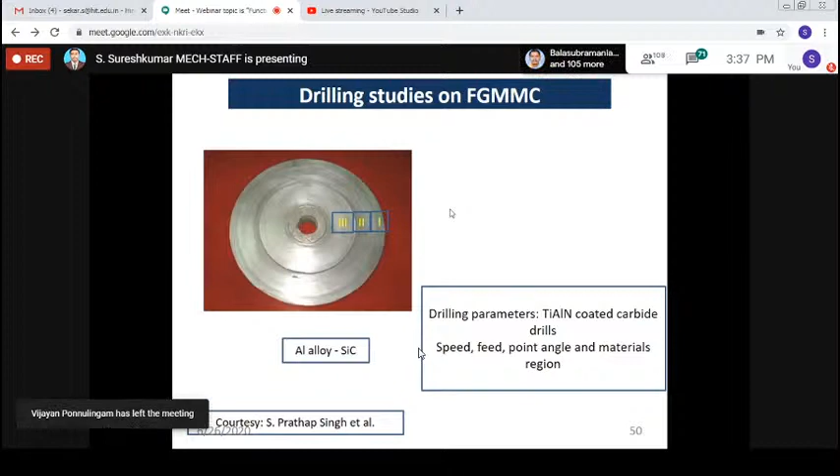First, region 1 is 15 mm from the outer periphery, region 2 is 45 mm, and region 3 is 75 mm from the outer periphery. As I told you, the hardness value is reducing from the outer region, where the rich mixture is available, there the hardness value is high. Moving towards the least reinforcement section, the hardness value is being reduced gradually.

And what is their machinability response? In terms of surface roughness, there is no much significant variation, but in zone 3 and the middle region there is some variation noticed. Of course, there is no defined trend, but a variation in surface roughness is noticed.

I told you in zone 3, the least reinforcement section, the machining process is easy. That's the reason why lower surface roughness is obtained, meaning a good finish is obtained in the inner section, zone 3, of the rotor disc.

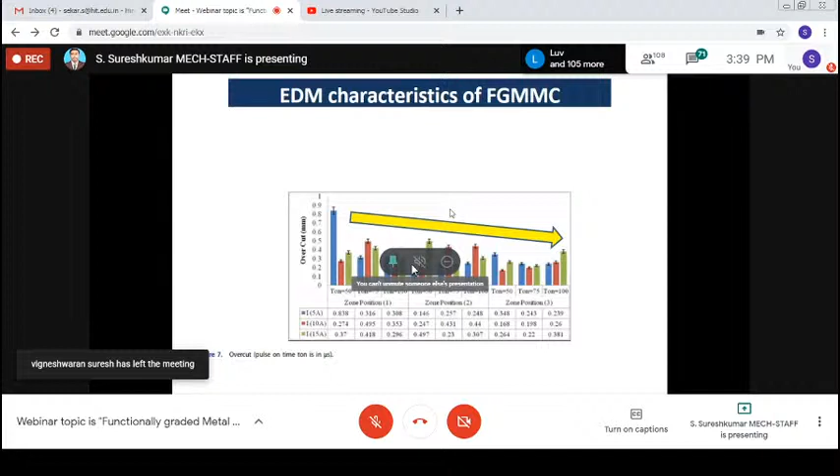Again, for the same reason, overcut measured with the EDM process shows the same trend for zone 3. Zone 1, where the rich mixture is available, and that's why the overcut formed is less. In terms of power consumption, these are the only authors who have reported the power consumption during the advanced machining process.

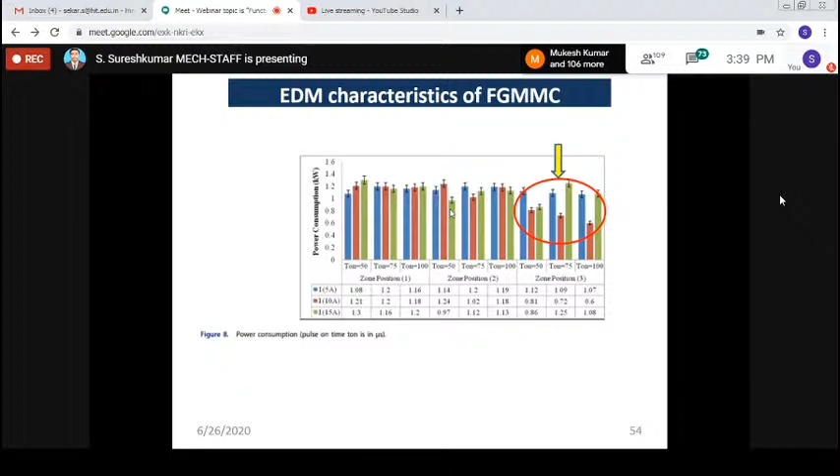The power consumption was measured in terms of kilowatts. It was reported that for region 3, power consumed for machining such a zone is less compared to the other two regions.

Seo, Kim, and Ramulu produced a similar kind of FGMMC based disc, again aluminum SiC based FGMMC composite. They made a construction and wanted to make a through hole in the sections, with varying 2 or 3 regions. The outermost region has more volume percentage of reinforcement, the inner section 20 and 15%. So there is a variation in the machinability characteristics obtained at the 3 different zones. These are reported by Seo et al.

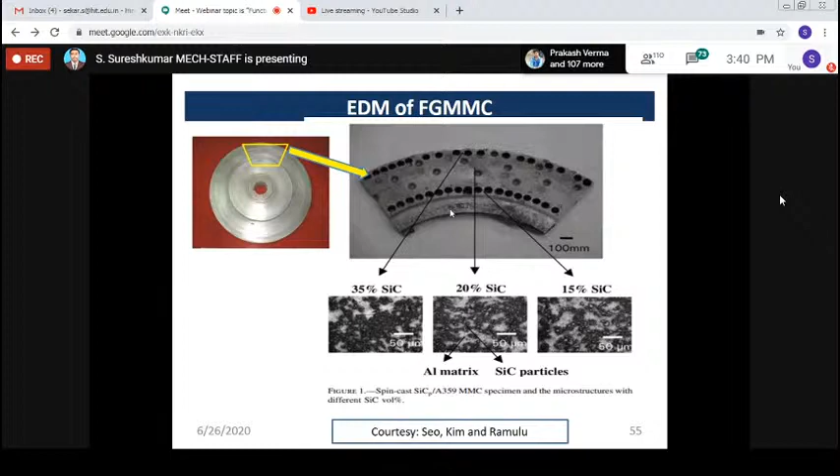From my understanding, most people have chosen aluminum, silicon carbide as the most widely chosen materials for metal matrix composite. Here, scientist T.P.D. Rajan tried to produce an intermetallic composite, an FGMMC based intermetallic composite. He chose pure aluminum as the matrix material, and aluminide, Al3Ni, as the reinforcement material.

So he made a hollow cylinder and tested the materials. I think he's the only person who made an intermetallic composite based on FGM principles. Again, as indicated in the graph, the volume percentage becomes low when moving towards the inner periphery, and the hardness also becomes the least.

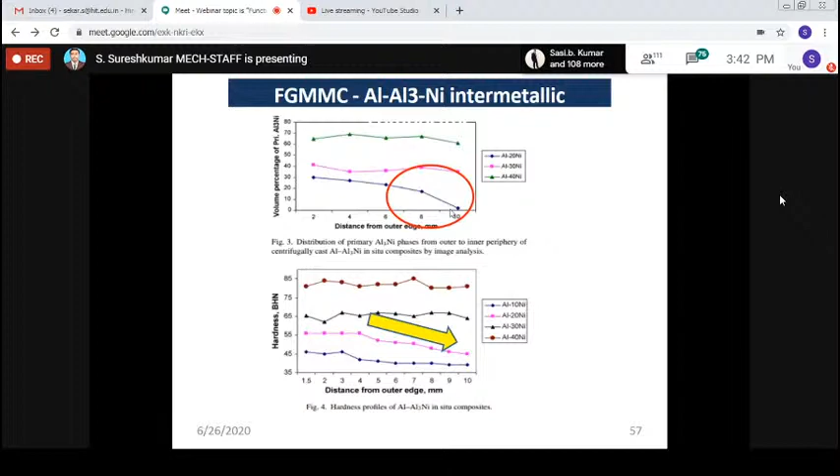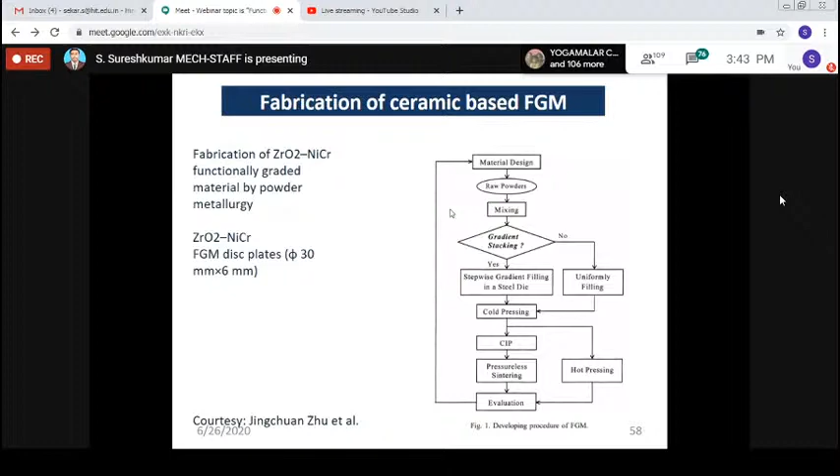As I told you, by stacking layers with varying percentages of material, we can produce the FG material by varying the percentage of reinforced particles, stacking one by one. The flows are mentioned in their report. Stepwise stacking in the die will end up with the functional graded material for ceramic applications, and their microstructure was also reported.

I think these are the research works reported on functional graded metal matrix composite and functional graded materials. This I would like to highlight in my presentation. Many people have done research work and investigated FGMMC, but the application for location-specific material or service condition is still required. It is still open for researchers - very few people have done tribological study, and very limited people have attempted machinability study on FGMMC materials, both conventional and unconventional.

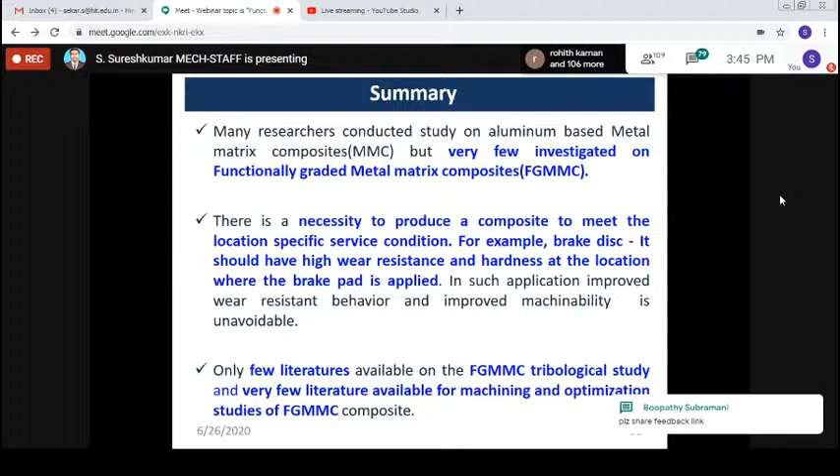What would be the extension or further future work to be done on FGMMC, functional graded material? Very limited work or none has reported on the corrosion resistance of FGMMC. That is another scope, and turning studies, similarly machinability study, machinability behavior of such FGMMC can be explored.

Further, with the motto of measuring the cutting force and the temperature produced, or even the smooth surface formed on the material, you can measure the profile of the drilled hole and explore further. Maybe in different regions, dimensional deviation produced may vary. That also you can explore more.

And of course, only limited FGMMC material in real-time application has evolved so far. That also you can explore more.

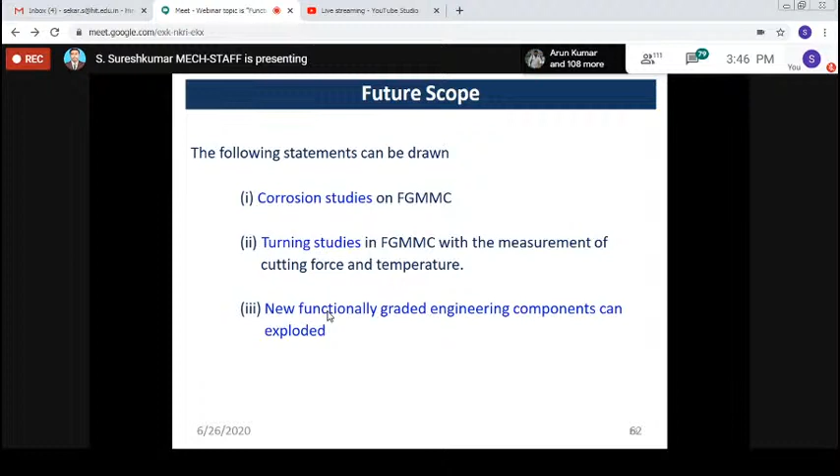And the point where I am supposed to acknowledge Professor K. Vinod Babu, who has done more research work on this. It helped me to make this presentation.

And I would like to appreciate Dr. T.P.D. Rajan, scientist, CSIR National Institute for Interdisciplinary Science and Technology in Trivandrum. He has been continuously working on functional graded metal materials and composite materials. Okay, here I stop my presentation.

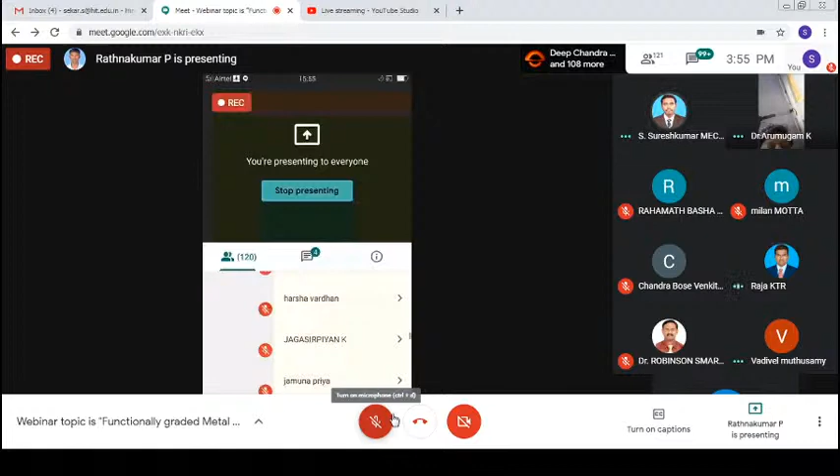Okay sir, got your question. In copper based alloy, magnesium based alloy, also people are working more. But the reason people mostly prefer aluminum alloy based components is that aluminum alloy has good properties like good strength to weight ratio and is light in weight. So most applications prefer materials that need less weight, that's why most researchers concentrate on aluminum alloy based composites. Even copper based composites, magnesium, all non-ferrous materials people are preferring.

In case of MMC, maybe in polymer matrix composites also people are working by varying different types of reinforcement, from natural to synthetic fiber. Even nowadays people are moving towards biocomposites, maybe getting a biofilm which is completely degradable.

Okay, thank you sir. Only one question, last one. Sorry for the inconvenience. No problem. What will be the maximum reinforcement percentage recommended for MMC, sir?

If you ask, some papers show 30%, 40%, I've noticed that. If you ask me, I will limit it to 20%, maximum 30%, sir. Even for your machinability studies and all, people may extend up to 30%. I understand from some literature that if the percentage of reinforcement is more than 20%, it will change the material properties - you may lose ductility in that higher range, and it will partially become brittle. Even though people go up to 40%, my suggestion is to limit it to 20%, maximum 30%, sir. Okay, thank you very much.